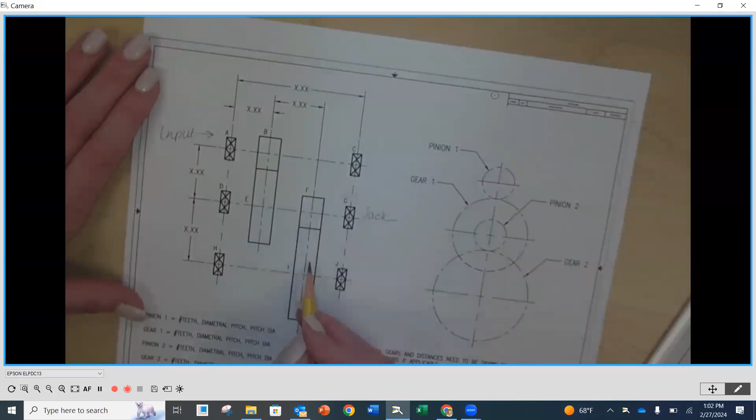And I'm going to make this big. You remember we figured out that we're going to have our input coming in up on the top here, so this is our input. Then we're going to have our first reduction, which goes to a jack shaft in the middle here, and then it goes to a second reduction, which is going to be our output. Now this was my very generic layout for how we were going to be getting the power, the rotational speed, through our gearbox.

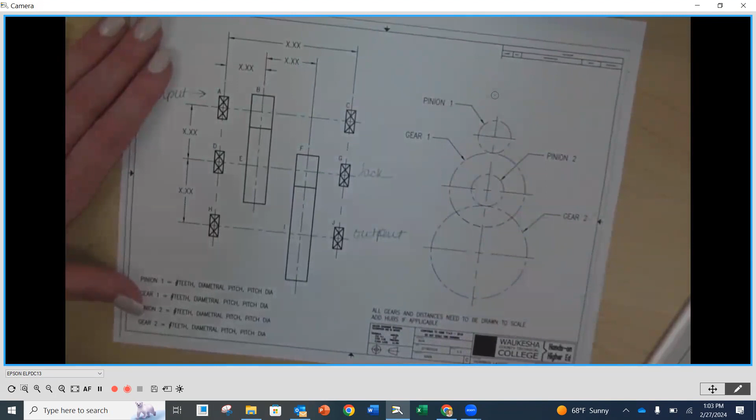You have taken the steps on picking out your initial gears for your first set, first reduction, pinion and gear, and then your second reduction, pinion and gear. By choosing those, you now have some numbers that are going to be what your center distances are, and then you also would have drawn your gears to scale.

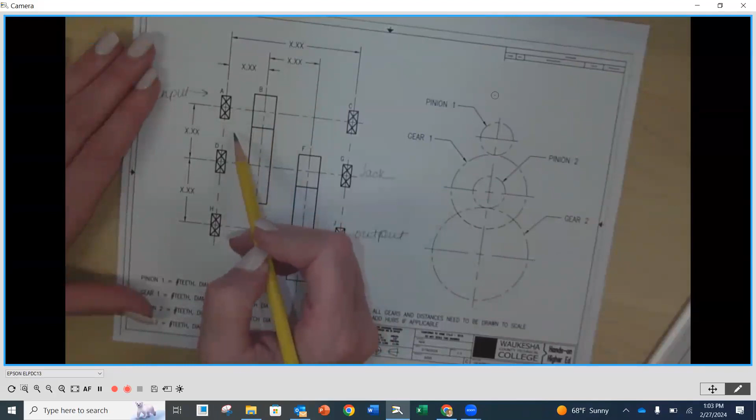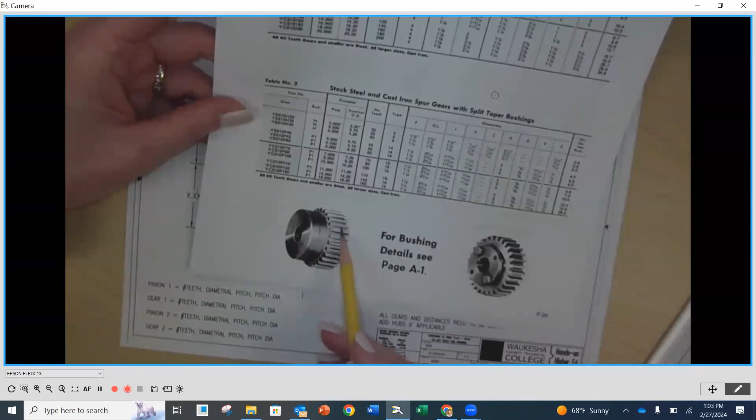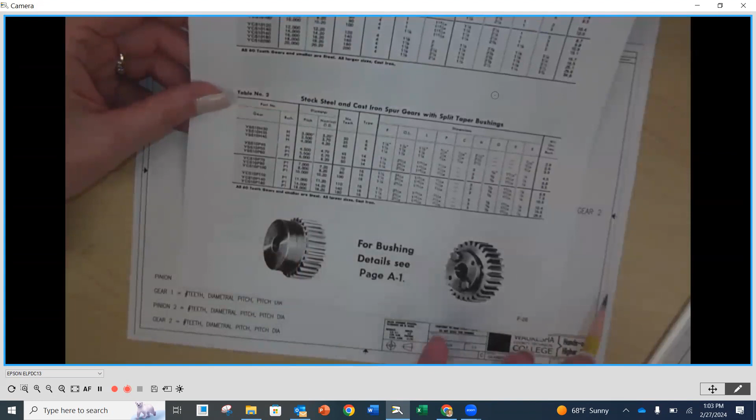Now more than likely you probably have hubs on one side of your gears, which is very typical. So if we look at, for instance, the Browning catalog, they have a hub on them, so they'll have a face width where the gears are, and that's really what I represented mine as. Very simplistic, but through investigating and picking out your initial gears, you would have then the hub, and you would have drawn your layout, with a hub on the front probably, drawn to scale.

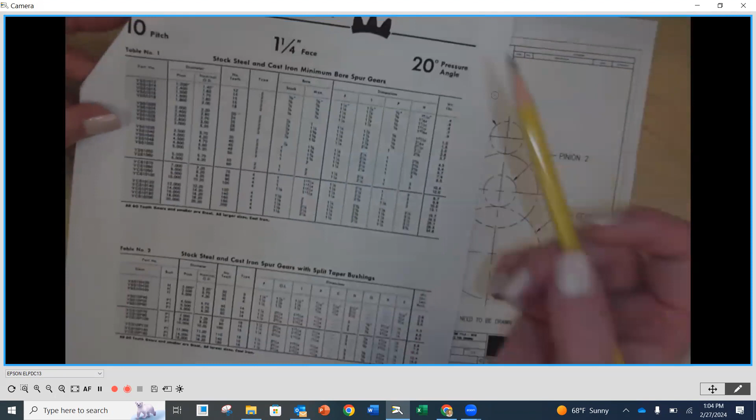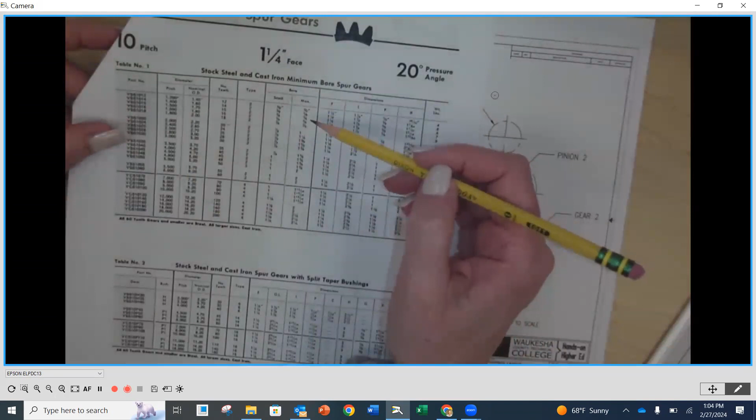Once we have this in place and to scale, then as you know we went on to the next phase of doing your shaft design. We needed the gears first because we needed those forces to see what needs to happen and what's generated at those points along the shaft to get the minimum shaft diameters. Then once you have your shaft diameters, you've got to go back and check these gears, and you've got to know does my max bore accommodate what my minimum shaft diameter is. So if your minimum shaft diameter is larger than your max bore, you've got to pick new gears. That happens sometimes, it's just part of the design process. Sometimes we've got to go back and forth before we move forward.

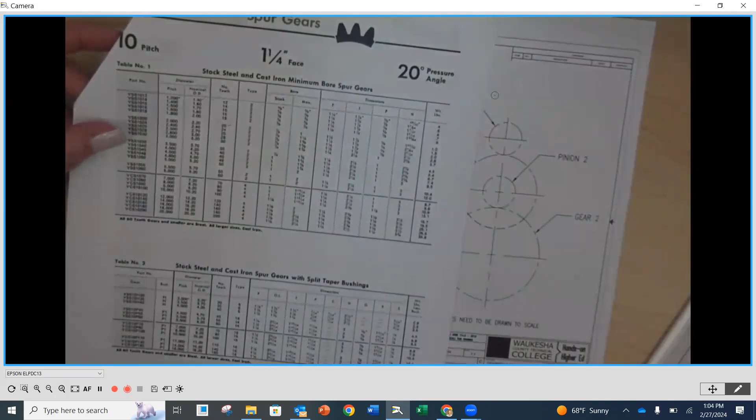So once you have your gears in place, then you'll probably revisit your layout, because if you did have to pick out new gears, these distances would have changed, maybe your center distances changed a little bit. And then you would move on to bearings, and we talked about doing the overview of what's included for the bearings. So once we've gotten to this point and picked out our bearings, we have our shaft, we have our gears, now we're ready to design the keys.

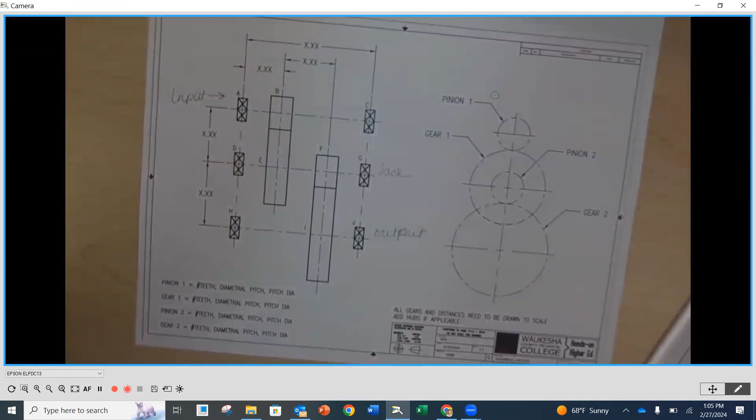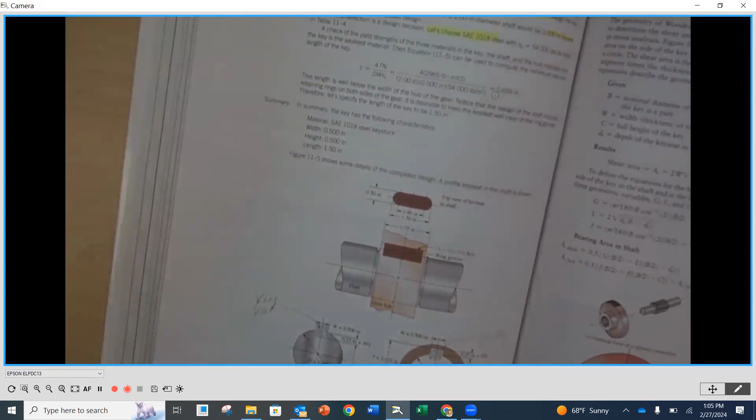The keys are the element that is going to keep our gears at the same rotational speed and motion, synced if you would, with our shafts. So in chapter 11, we looked, and I'm trying to remember what module it was, I think module 4 or 5, module 4-ish, whatever, doesn't really matter, but we've looked at key design in our modules, and we looked at chapter 11.

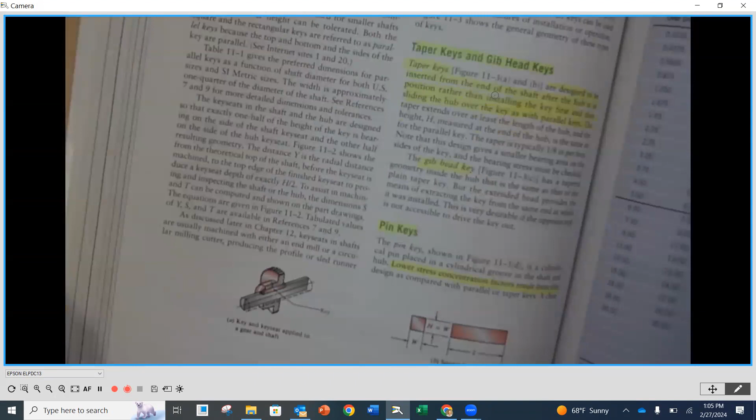Going back to figure 11.1, this is a nice cutaway of a gear mounted on a shaft. Right here is where the key sits, in what we call a key seat, and half of it theoretically sits down in the key seat in the shaft. Then it extends up into what we call a keyway in the gear, so it's interfering with both of them, so that when the shaft rotates, it brings the gear along with it. The key is what we're designing now.

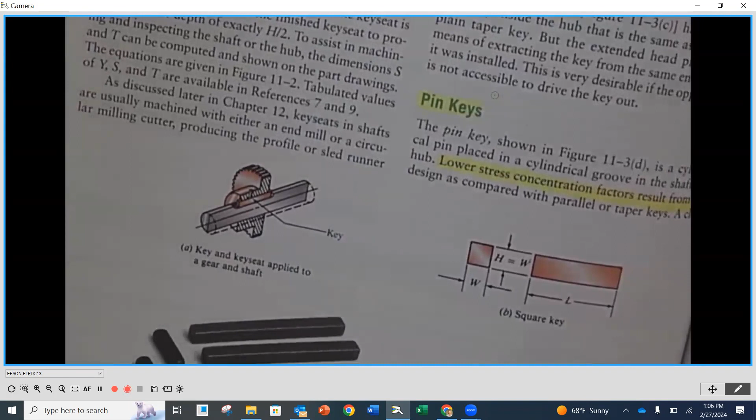The key needs to fit in between and make sure there's not too much slop. We want a nice standard fit, so when the key slides down in there, there might be a tiny bit of wiggle room, but not much at all—if anything, maybe line to line contact. Because as that rotates, we don't want much of a gap before it brings the gear along. Sometimes that's referred to as a little bit of backlash in the key, not in the teeth. So we're going to be designing that key.

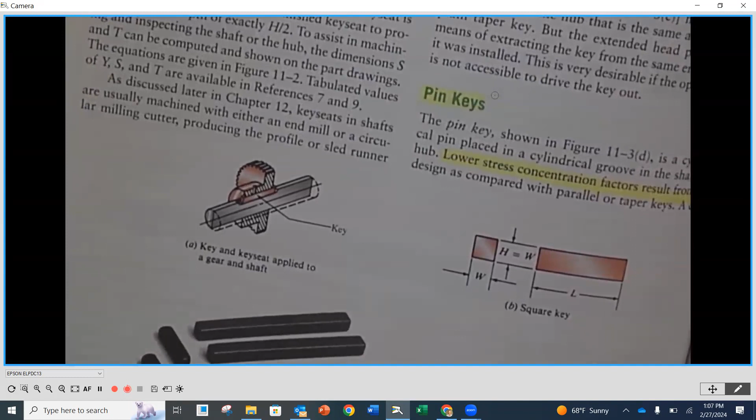You probably remember we've looked at this not that long ago, and we used a spreadsheet to help us along. So I want to pull up that spreadsheet and revisit exactly how we walk through it and the things we want to look for and be aware of.

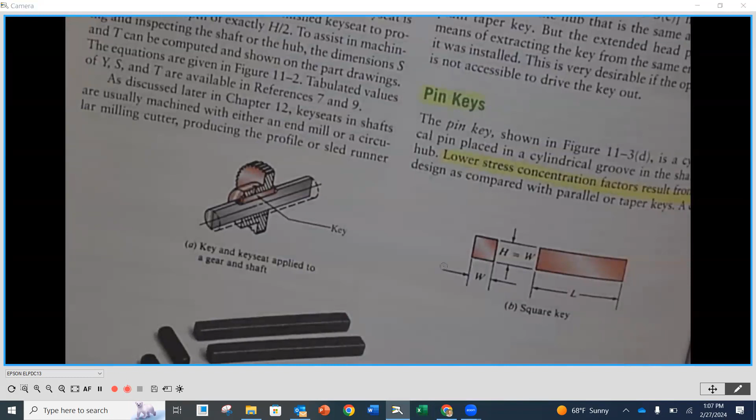I'm going to go back to our downloads and open up Excel, and pull up the file—I know I put it in my downloads folder. The file name is Gearbox Key Design All, because I've incorporated all 4 keys on the same spreadsheet so you don't have separate files for each one. I'm going to enable editing at the top.

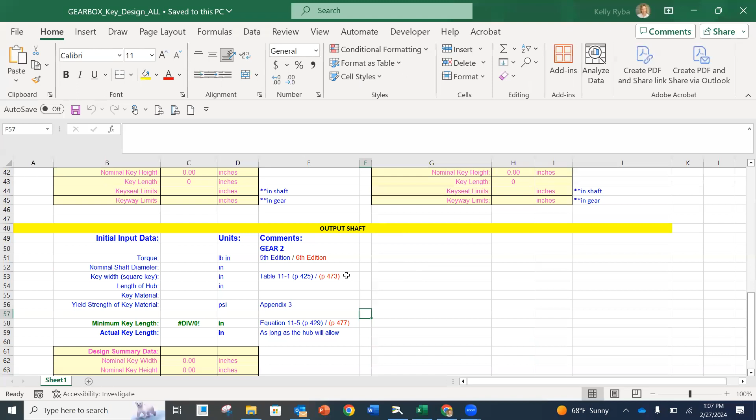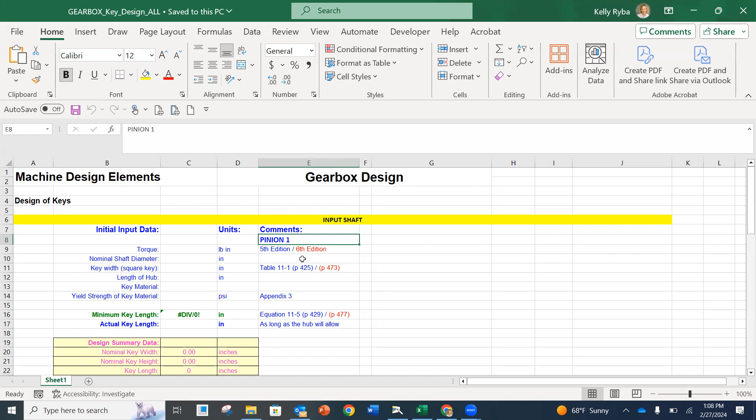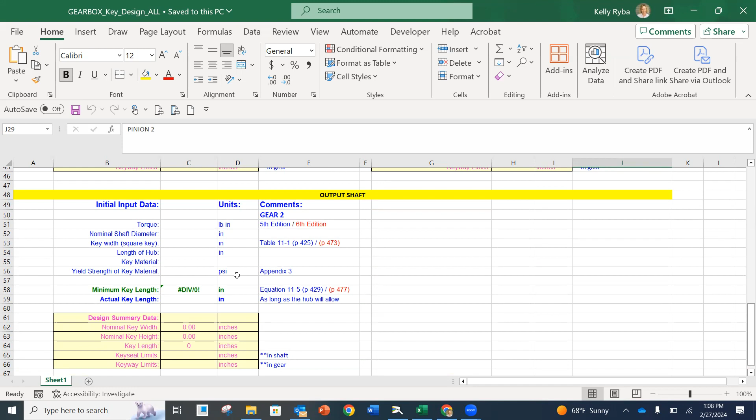As you go to the top, it has that same banner across like the Bearing design did—I used that design for my start. This is going to be the key on the input shaft, corresponding to the first pinion in the first reduction. As we go down, the next section has two parts: this is the gear in the first reduction, and on the right side, the pinion in the second reduction—the 2 just means second reduction, the 1's are first reduction. The last one is gear 2, the gear in the second reduction. Each one of these sections works identically.

As we look up here, the variables we need to put in: first is torque, which needs to be in units of pound inches. Then we put in our nominal shaft diameter, in inches. The nominal shaft diameter is the shaft diameter where you've mounted the gear and determined this is my shaft diameter—so this isn't minimum shaft diameter, this is what you're actually going to make it, which you would have determined at the shaft design stage, lining it up with your gear to make sure those two work together.

And then you would have decided on the fit—we talked about how to pick out that fit, the class of fit, and you would have applied that. So now the nominal size: even if your limits of your shaft are to 4 decimal places, you have a nominal size. For instance, if it's 1 inch, but the limits are 1.0016 down to 0.998, your nominal size is still 1 inch, and that's what you want to put in here—what is your nominal shaft size?

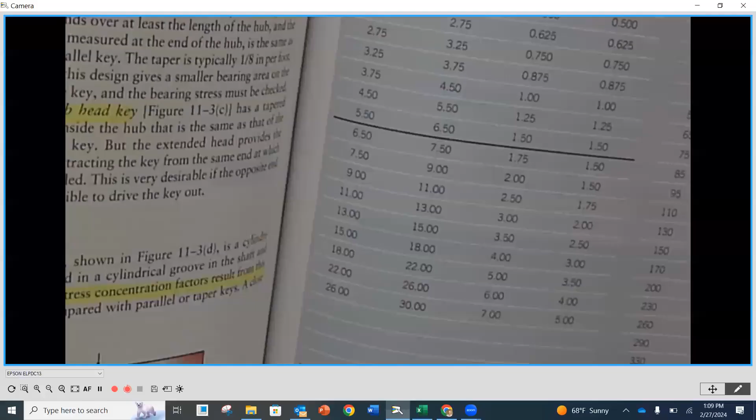Then you're going to determine the key based on that. My key is going to be a square key. I'm going to go to page 473 in the 6th edition, or 425 in the 5th edition, and we're going to pick our key size based on that shaft diameter. This is the very same chart you'll find in the machinery's handbook—this is not anything the book made up, it's off of standard sizes.

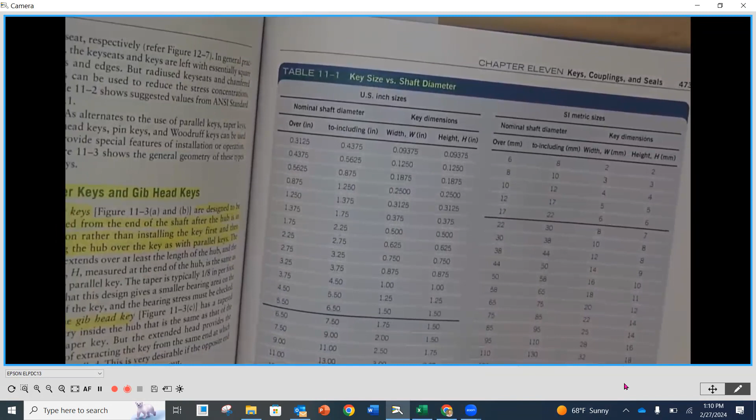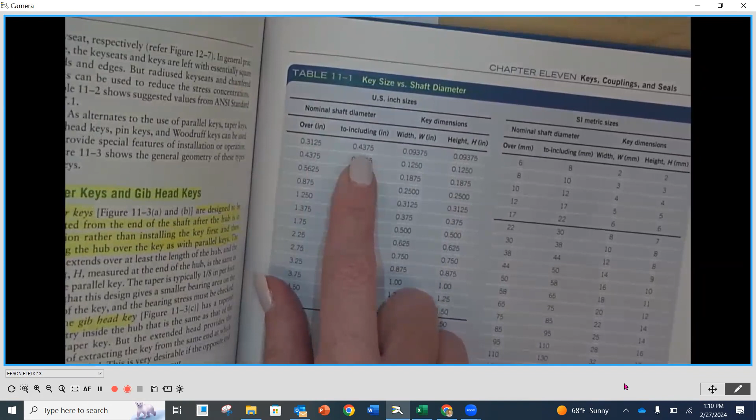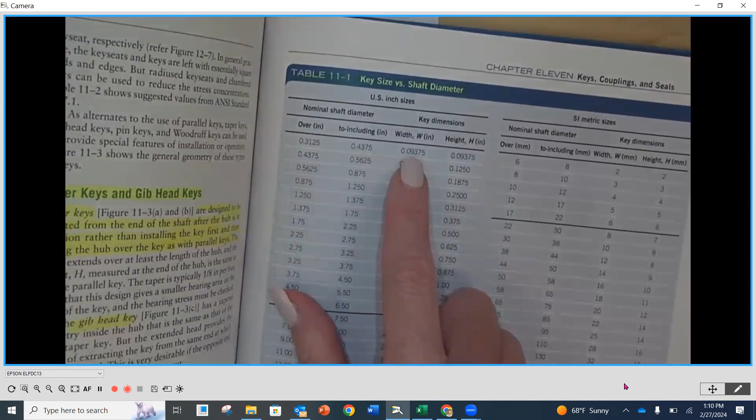We're going to find our shaft diameter between these two columns—it says over 0.3125 and including 0.4375. So if your shaft diameter nominally falls within that range, you go over to the right, and your key dimensions—height and width—are going to be that size. You do that same thing all the way down.

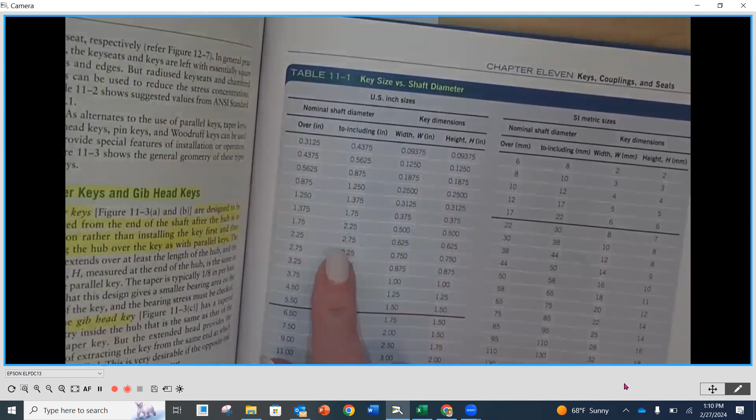Okay, once you get your nominal key size, then you need to determine what your tolerances are.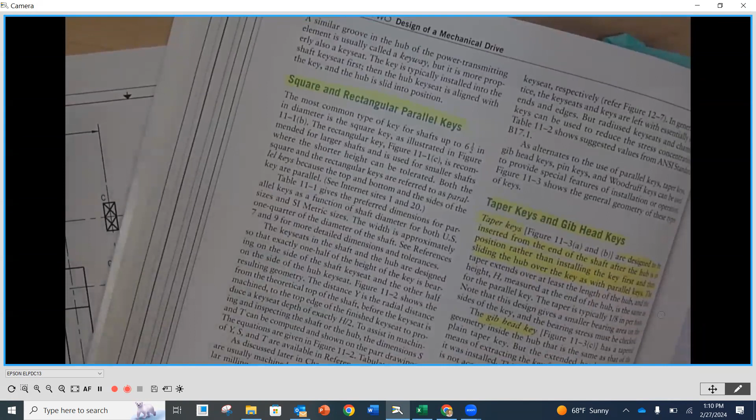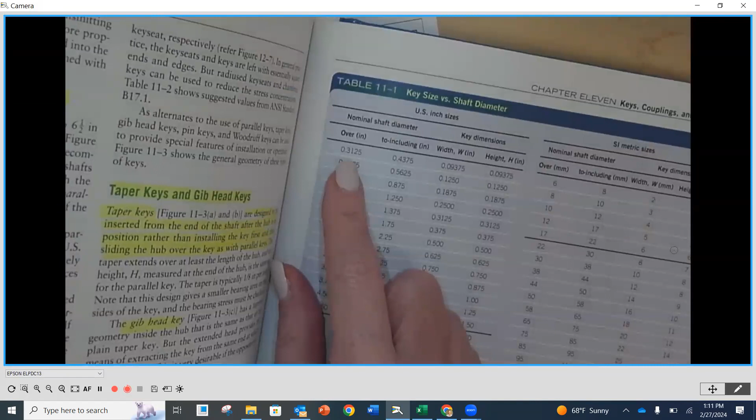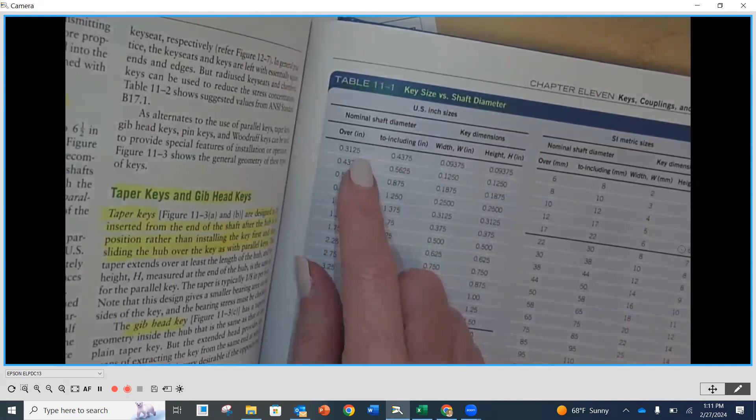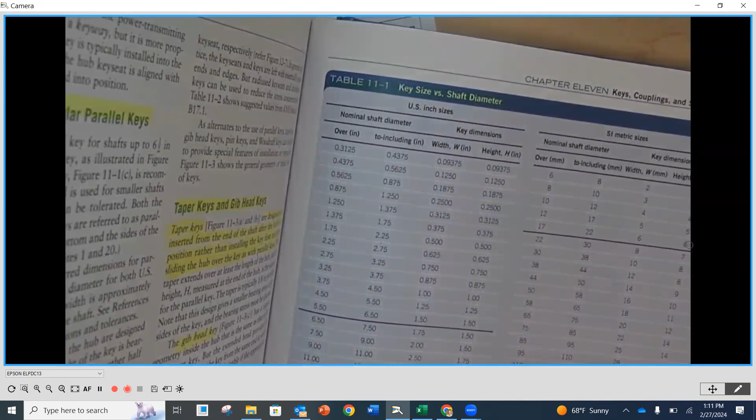BJ, do you have your hand up? We might have to look to a different resource for you. Yes, there are shafts smaller than that, but then you're really super tiny, so we'll have to talk about that and find a different resource. Maybe the machinery's handbook. Hold on, no, it's down to 5/16. Now that I think about it, it will be okay. Bearings are smaller than that, but your gear, oh okay.

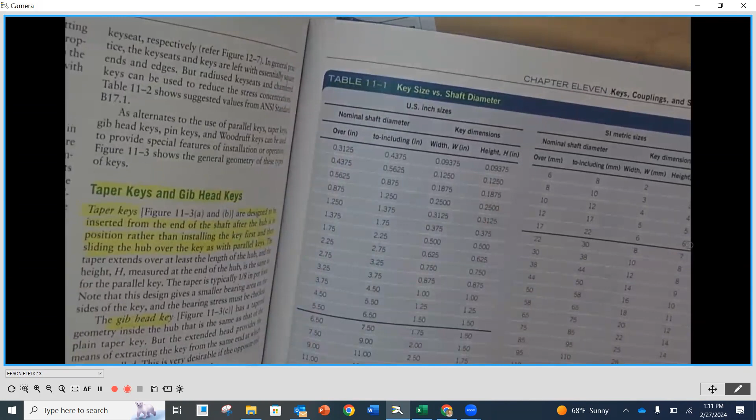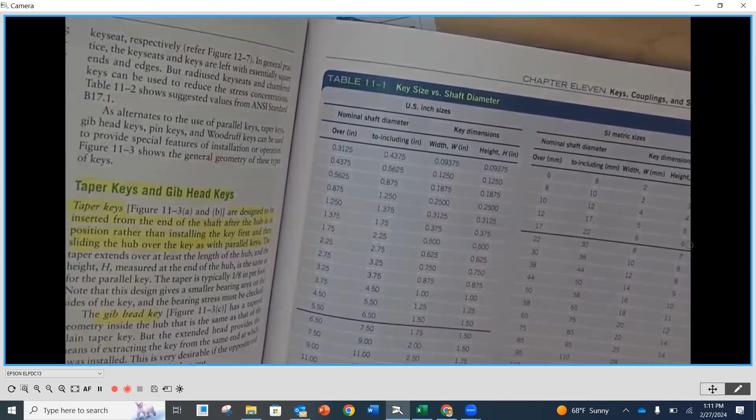Alright, so you'll find your key size over here. Now this is nominal, so for instance I'm going to go to a nice number, a 1/4 inch. If my shaft diameter is 1 inch, then a 1/4 inch square key is what I'm going to use. But that's just the nominal size, we need to make sure that this fits. You can't just draw a 1/4 inch key and a 1/4 inch key seat and think everything's going to work, because remember, the title block tolerances apply to any dimension on a drawing that doesn't have a tolerance specified.

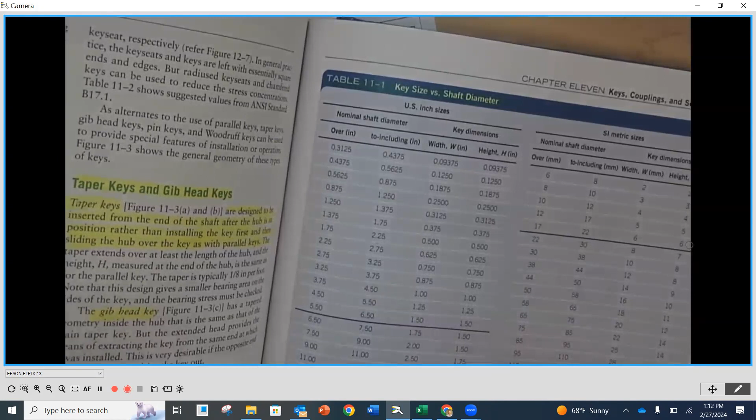So what we need to do is make sure the fit is appropriate, and that's where we use the machinery's handbook—it's already kind of figured out for us, which is nice. Once you know that nominal size, you're going to put it into the key width. You also need to know the length of your hub, which comes from whatever gear you chose. Now you need to put your key material in here. Your key material is going to be the weakest of the 3. A good place to start, I think it was 1020 or 1018 that was in the chapter, but you want to make sure it's the weakest of the 3 materials.

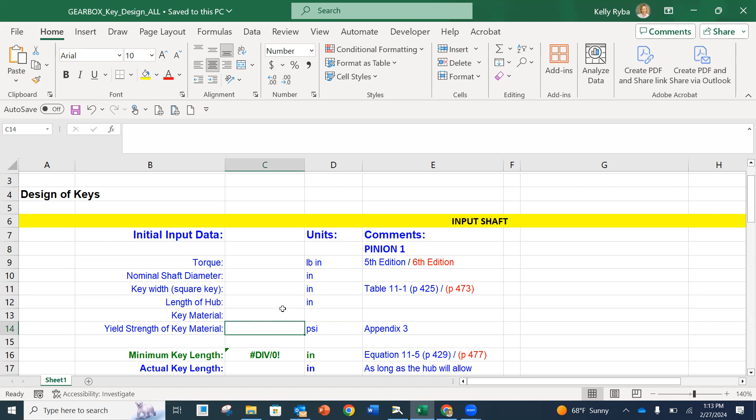Yeah, through the gear, it's going to run all the way through the gear. But remember, you can't go outside of the hub, and I'll talk about that in just a second. Then you need to know the yield strength of your key material. And it's going to calculate a minimum key length for you. It's going to be a funny number, but hopefully it's nice and short because it's going to be within the confines of your hub.

After that, then you pick your key length, and this is where you have to look at your hub, but also in relationship to the elements outside of the hub. So I'm going to go back underneath—we looked at example 11.1 when we did this module.

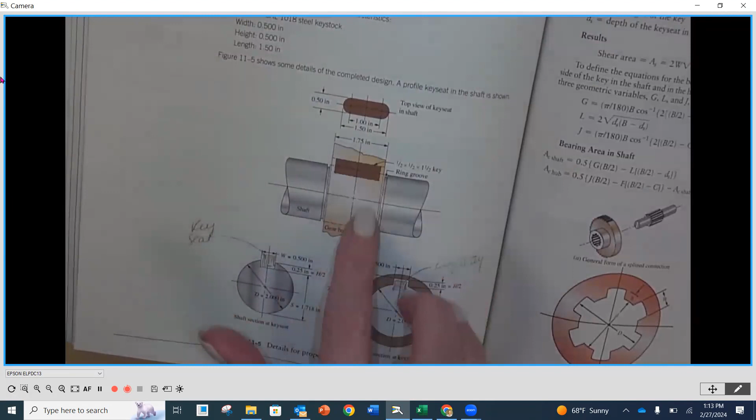So you'll notice here that we have the side view of our shaft, and this is where our gear is going to be. This one didn't happen to have a hub, but this is how wide we can deal with. Our key is on the inside here, and you'll notice that the key does not go outside the confines of our hub.

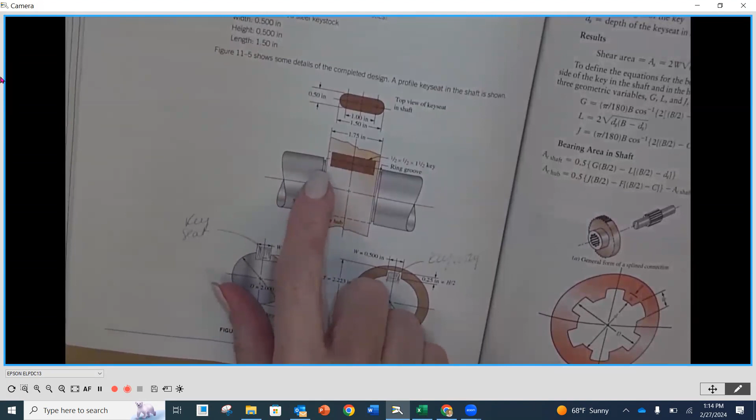The reason we cannot is because in this case there's a retaining ring on either side. If we cut into the retaining ring, we no longer can pick the larger of the 2 KT values—now we have to add them together. So instead of 3, we would have 3 plus 1.5 or 1.6, I forget what it is, giving us a 4.6 KT factor because you'd be taking out material here and causing more stress.

So when you do your design, it cannot be outside the hub. Yes, the keyway is going to go all the way through—it's going to be broached all the way through, but you're going to be on the inside here. So if we look at the top of this, there are going to be radiuses on the outside to accommodate the width of our shaft or key. The key most often is going to be cut square on either end.

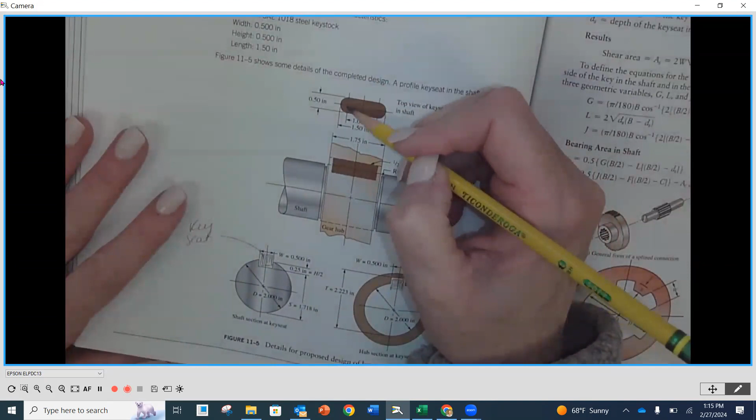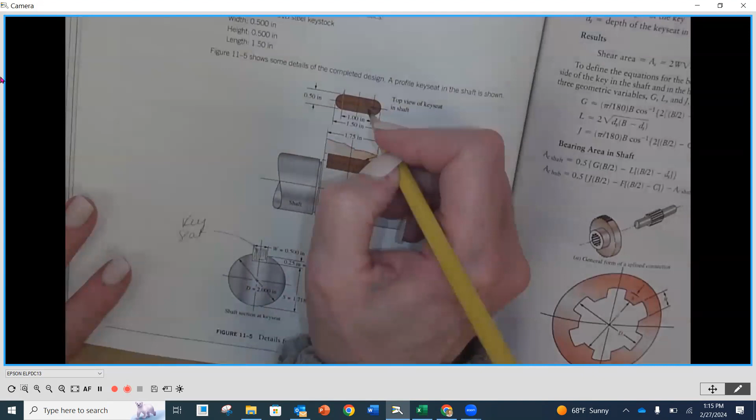Those radiuses are going to be based on the tool that we're going to be plunging in to make that groove. Those grooves, those ends cannot be outside of the hub. They cannot be outside of the hub.

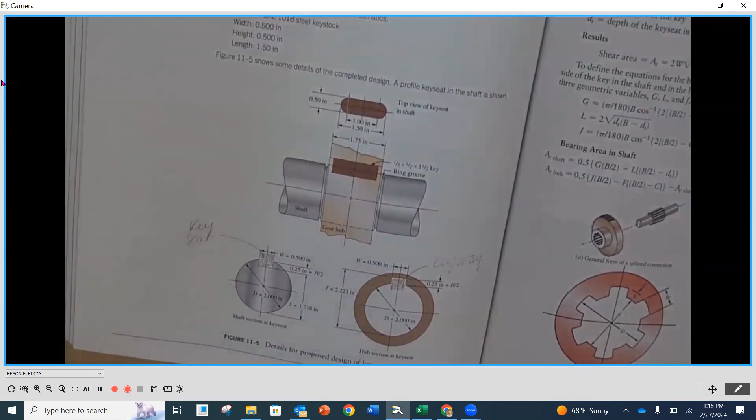So Brandon's question was, you have the face width and then you have the hub. You have the entire length inside here to get your key within, and the radiuses. You don't have to just be by the flats or just by the hub, because that keyway is going to go all the way through.

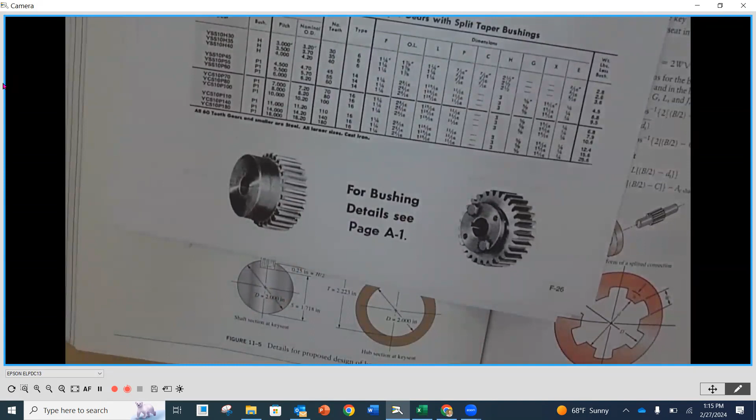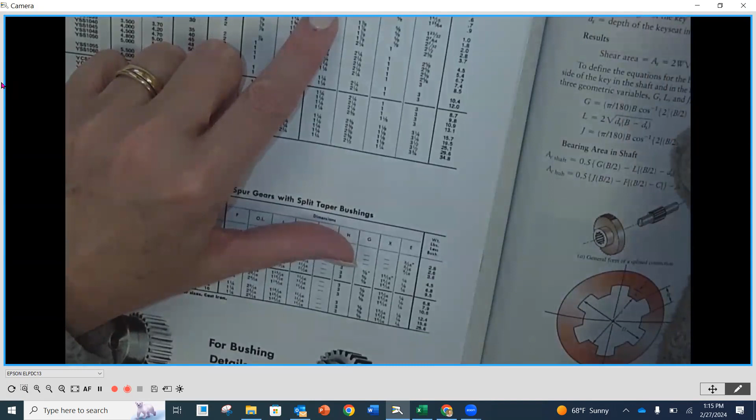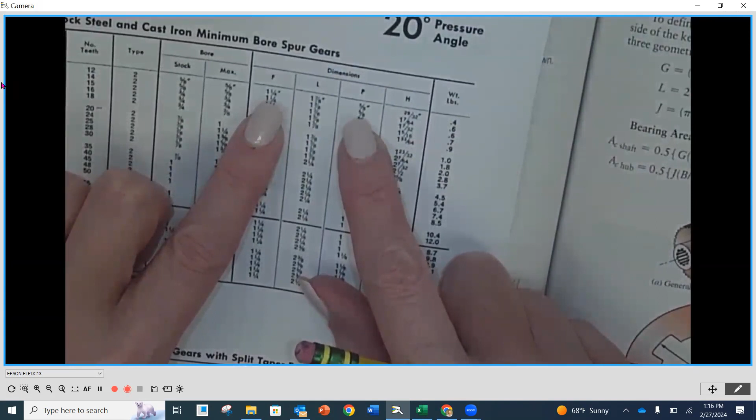So let me see if I have a distance here. We would have a P and an F. My dimensions for F on the top line are 1 1/4, and P is 5/8. We add those two together for the total length through. So you have that entire length, and that's usually never an issue.

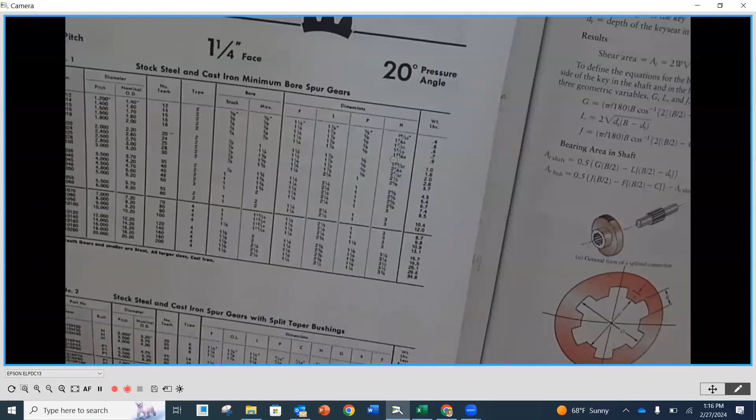It's just designing your key so it's short enough, because if I have 2 inches total from my hub, my key cannot be 2 inches. I look for that. That's why you have to put your length of hub in the Excel spreadsheet, because that's something I check.

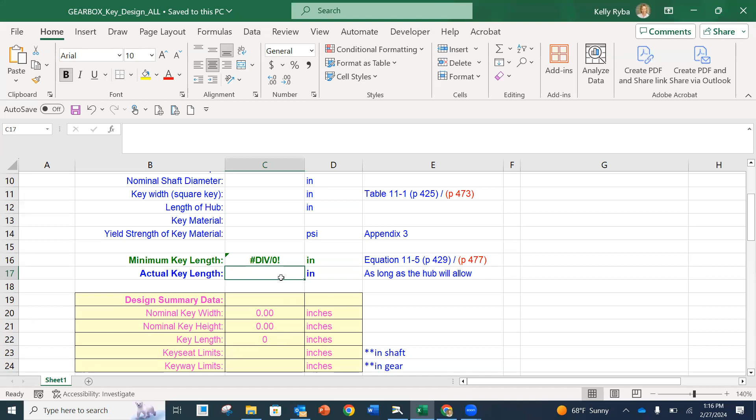So that's a little bit of calculating, maybe a little bit of layout work you want to do to be sure those radiuses are correct, because I will look at that. Once you have your actual key length, it's going to tabulate some of that information down here, but there's some things to fill in. It's going to grab your nominal key width and nominal key height from up on top, since it's a square key, and your length comes from where you determined the actual length of your key.

But then you're going to be putting in your key seat limits and your key way limits. Key seat is where it's going to actually sit down in the shaft. Key way is where it's going to go through in the hub of your gear.

Now to find these limits, these come out of the machinery's handbook. Our book did not address these, that's not in our book, so I want you to find it in the machinery's handbook. We have two of them in the lab, but I also have a couple pages scanned. They're not great quality, just because of the floppiness of the book. Then you're going to put these limits in here. Remember, limits are when we look at the tolerances, what is its high value and what is its low value.

Let's look in the machinery's handbook to see how we find these. Now, different versions of the machinery handbook - my personal version is the 28th edition, the one we have here is a 23rd edition that's been floating around. Pages are going to be different in different editions, so just be aware of that, but they all have the same sections.

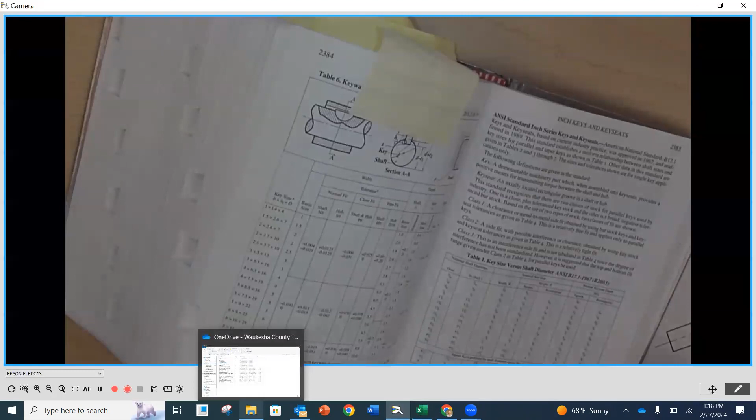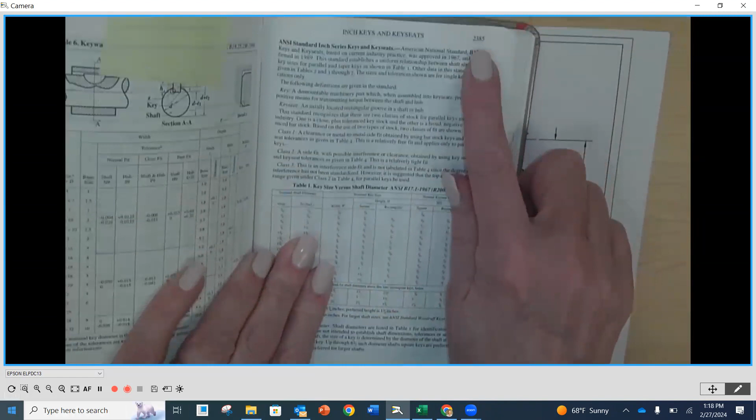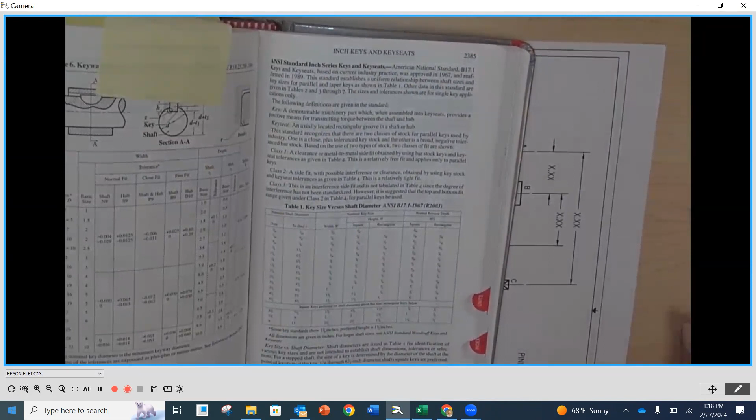So I'll go back underneath my camera here. I'm looking at the 28th edition, pages 2,385. This is where we have our keys and our key seats. The first chart on this page is where we pick our key size versus the shaft diameter - same chart that's in our chapter 11. Chapter 11 is maybe a little easier to read, because it's bigger print, and they converted it to decimals as opposed to fractions. So that's that chart.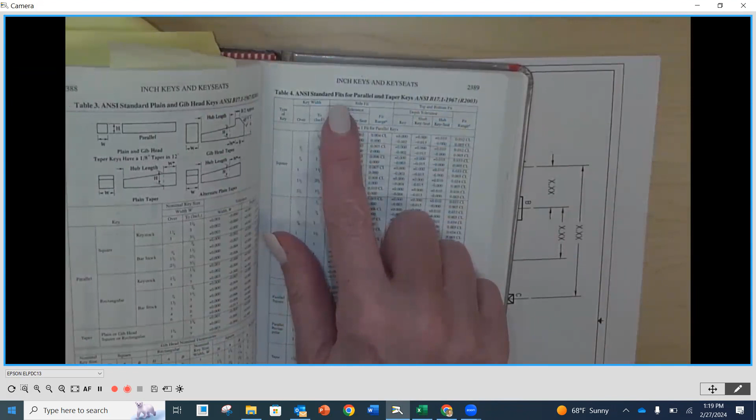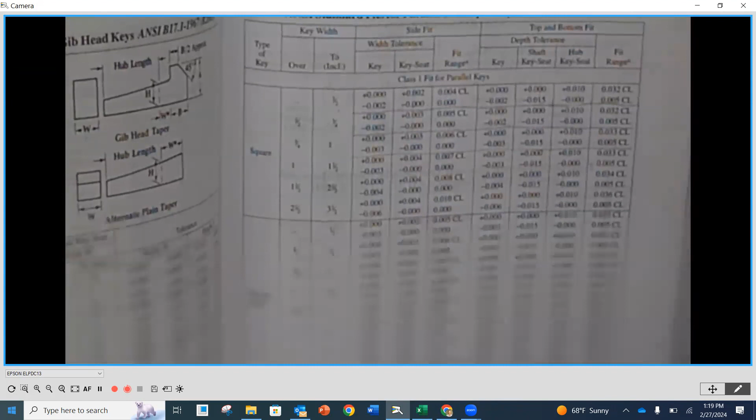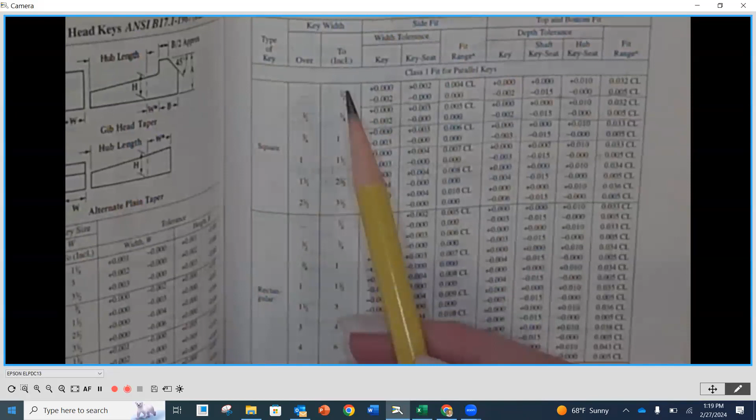Then I'm going to go a couple pages in, to page 2,389. These are going to be the standard fits for parallel and taper keys - these are parallel keys that we're designing for. I'm going to try to zoom in here, this is small print. On the left-hand side, they're going to give us a column for over and including, and this is where you're going to find your key width. That's the first column. Then we're going to go over to the right, and this is going to be the width dimension, or the width tolerance - just the width.

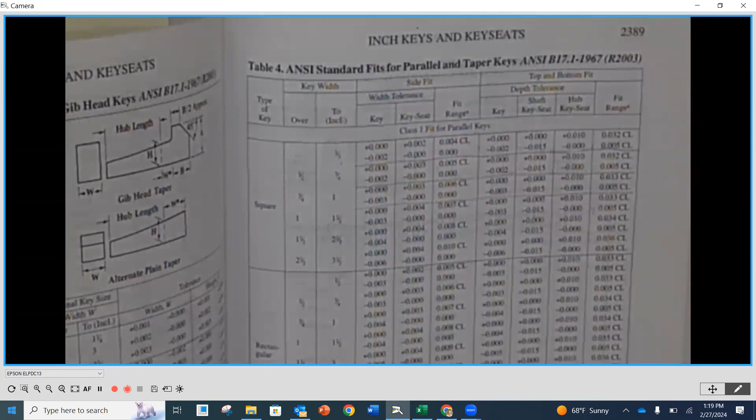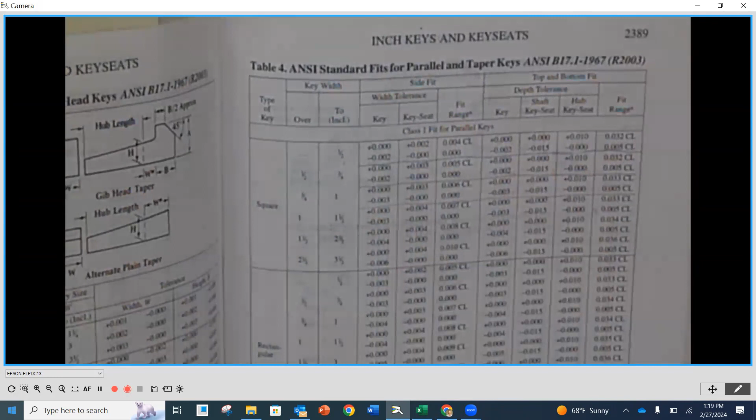Let's see, so now you're going to go over - here's our key width tolerance. Now this you don't have to worry about, because it's based on standard key material.

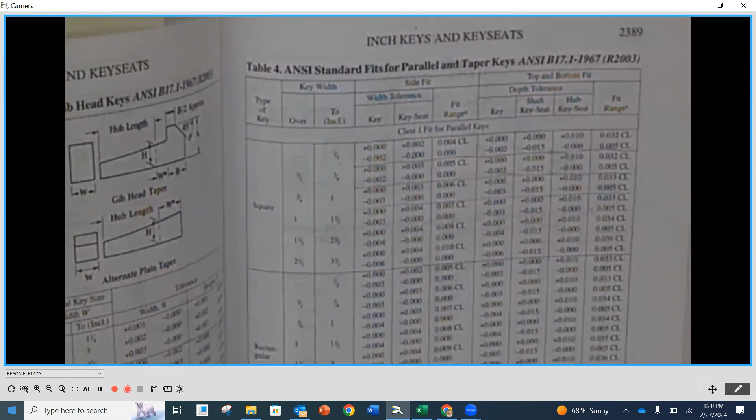So when we specify a key, unless you're going with some different type of material, there's key stock out there that we usually get that's going to be to the dimensions we're expecting here. So it's a +0, -2, ground, relatively accurate.

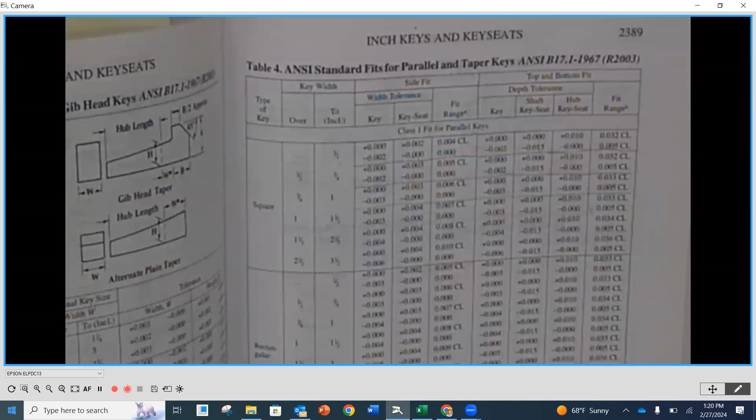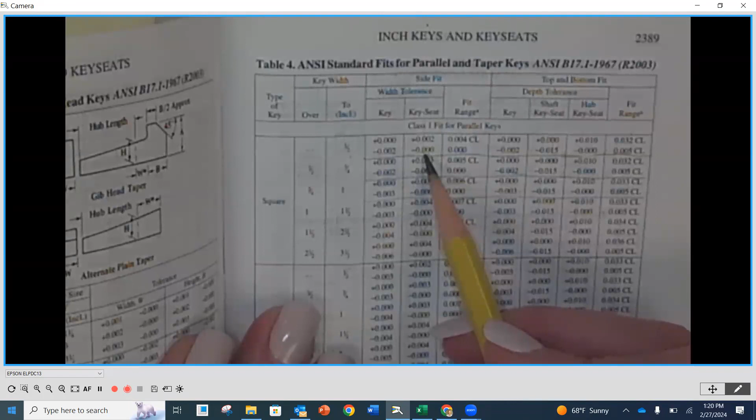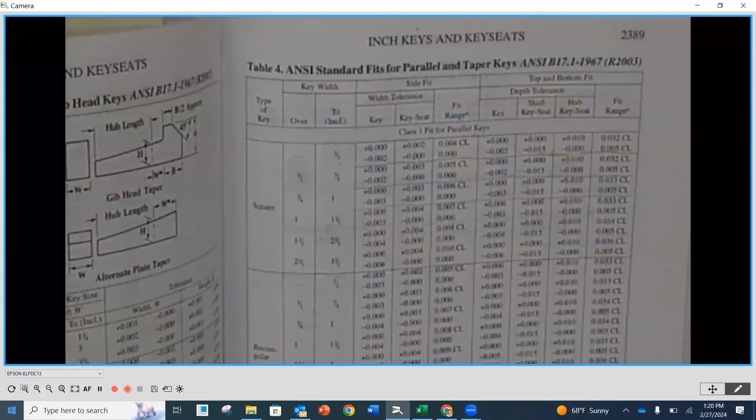To accommodate that, you are then going to add the following tolerances to your nominal size of, let's say, a 1/4 inch. You're going to add 0.002 for its top limit and subtract 0 for its lower limit. So you would say 0.252 is my high value and 0.250 is my low value. Those are the limits of the tolerance for the key way or the key seat.

So now we look back to our Excel spreadsheet. That's what we would put in here for our key seat limits, and that's the width dimension. I'll add width in there because I thought I had that, but that's going to be our width.

The height is going to be a little bit different because we're going to be getting our dimension from the bottom. Don't worry about the height because there's almost a 32nd of an inch difference in some cases. It's not as critical, but the width is what's most critical.

So you want to put that for the key seats, and it would be the same number for the key way. The reason I'm differentiating is because the key seat limits are the ones that you put on the shaft. You're going to go back to the shaft spreadsheet—there's a column you created in your summary data where you'll put your key seat limits.

And then you're going to go to your gear. There too, you have a column that you added as the requirements for the key way limits, and you're going to be adding those in there.

Okay, we're not going to be doing any drawings. We're not going to be releasing these to production. If you wanted to create a layout using parametric CAD, you can, but I'm not requiring it here.

I wish we had a little bit more time. If we had an extra week or two, I would, but I want to get you to the point of having all the items you'd need to sit down, model, and actually do the details. So these are critical things, fits that you have to be aware of.

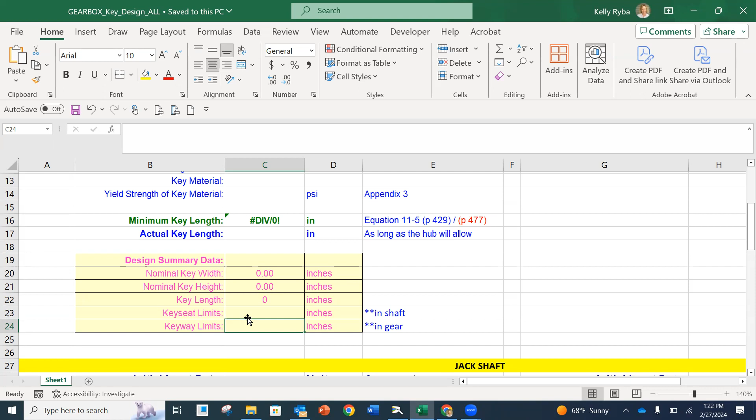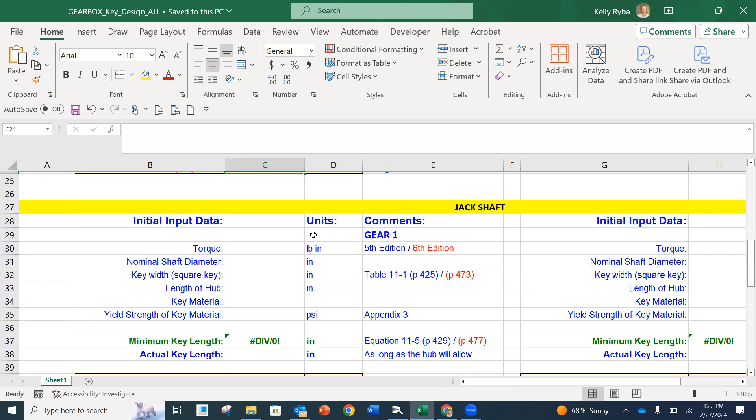So these are going to go here, but they're also going to go on the shaft spreadsheet and on the gear spreadsheet. You're going to do this not only for your pinion one, but also down on your jack shaft, for where your gear one is mounted and your pinion two is mounted, and then lastly for your gear two.

So again, in that double reduction, 4 keys are what you need to design for. Any questions at all on this?

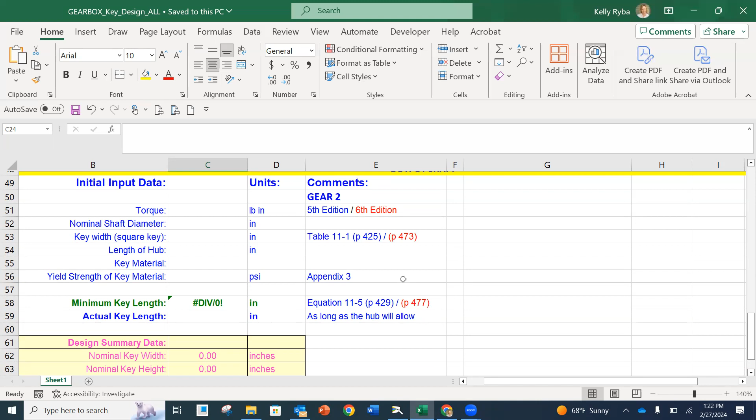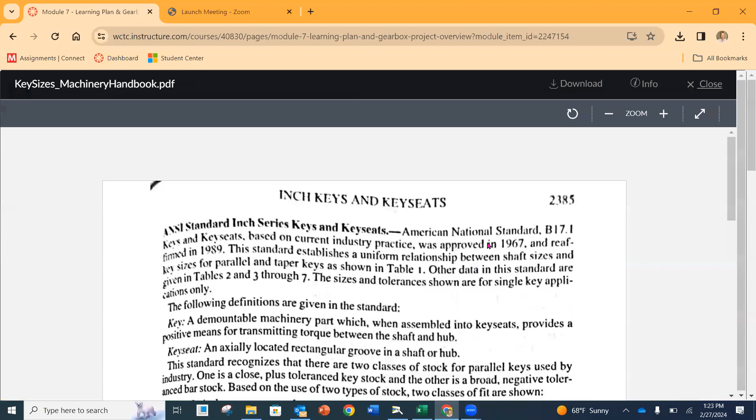Okay, back in the learning plan, I do have—I think they're really kind of grainy and not great to look at, but I guess you can get by with them—these are the machinery handbook pages. This is the first one, and then the second one is of about the same quality. So that's there if it's more convenient for you.

Any questions on those elements just yet?

Okay, let's go to the key design assignment, so you know exactly what you need to hand in and do to round that out.

Going down here, you'll notice that in our gearbox design project there's gearbox keys. These are worth 10 points. We click on that, and it says you're going to design each key found in the design of your double reduction gearbox. Here are your resources.

So I put in here the Excel spreadsheet that we just looked at, and then those 2 machinery handbook pages if you want to use those. It says here, make sure to add the keyway and the keyseat limits to the gear and the shaft design. I need to clarify this.

You're going to be uploading the spreadsheet file for me, because then I can see your values. You'll be filling out each one, which gives you all the details, and then uploading the Excel spreadsheet. I'll add that in here for clarification. So your deliverable would be the filled in Excel spreadsheet.

So, questions on key design?

Okay, then what I'll do is stop there and we'll start looking at locational elements.